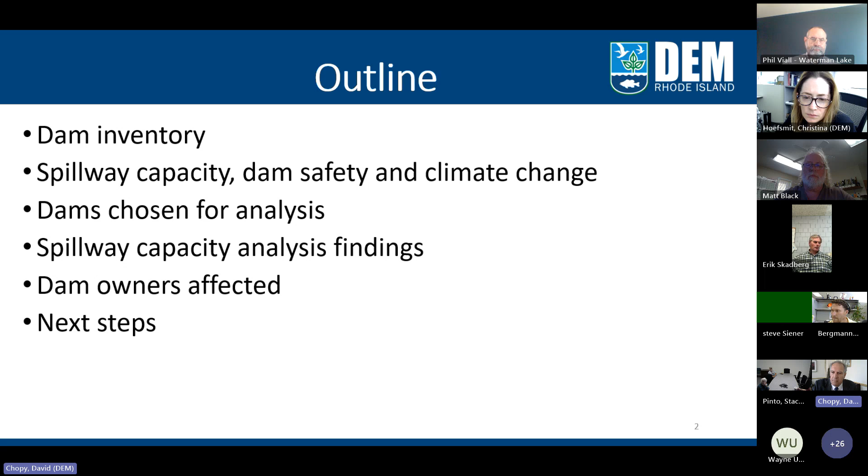Sorry. So there are 670 dams that the state regulates. There's thousands and thousands of dams in the state. Most of them are very small, 1 foot, 2 foot height. We don't regulate those. We only regulate dams that are 6 feet or more in height, or have 15 acre feet or more of storage capacity. And just for perspective, an acre foot is about 325,000 gallons.

Or it's been identified as a high hazard dam, which I'll explain if you don't know, though most of you probably already know this, or a significant hazard dam. So if it's not in one of those categories, we do not regulate it, even though it is a dam. Our focus is just on the regulated dams. There are currently 96 high hazard dams and 81 significant hazard dams. Sorry, that's what it was when we did this study. It's changed a little bit, as you note in the footnote, but it's the high hazard and the significant hazard dams that are the focus of our program.

There are 494 low hazard dams. We don't spend any effort on low hazard dams except to evaluate whether they should be upgraded to a higher class because some construction or buildings have occurred downstream that might warrant changing the classification. So the focus of our program is high hazard and significant hazard dams.

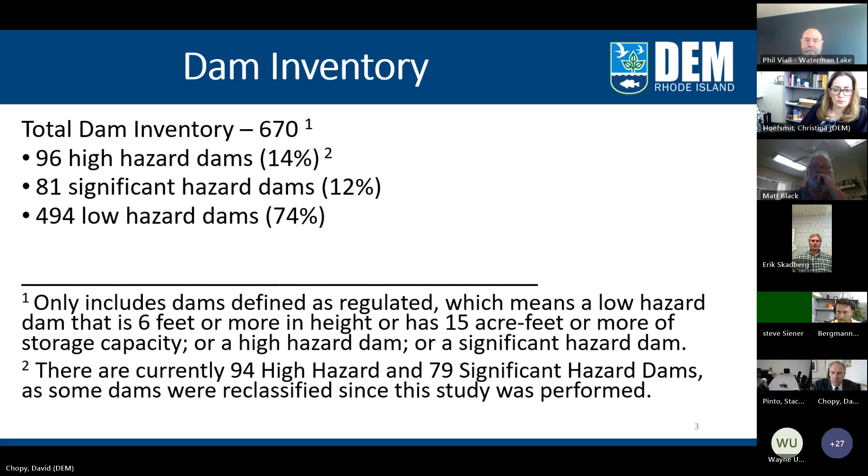For those of you who don't know, the hazard classifications have absolutely nothing to do with the current condition of the dam. They are totally separate things. A dam could be in poor condition, but that has nothing to do with its rating, whether it's a high hazard or significant or low hazard. It's strictly based on what would happen if the dam were to fail. That's what these classifications are based on.

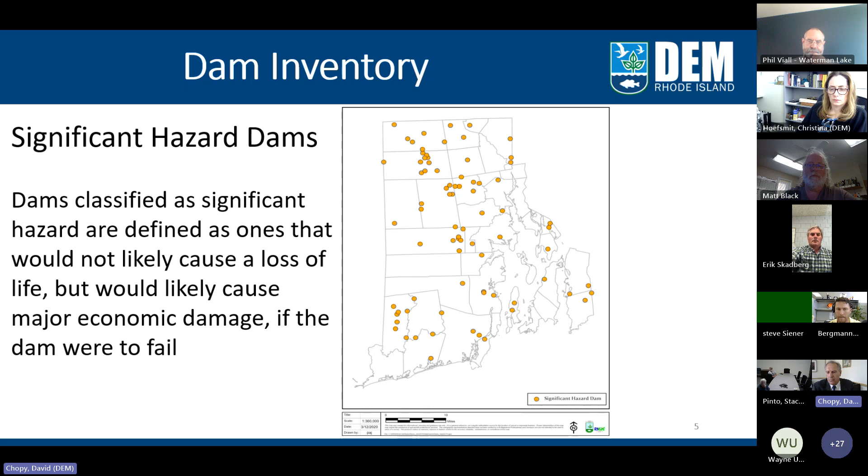These are all of the significant hazard dams. So a significant hazard dam is one where if it were to fail, it's not likely to result in a loss of human life, but it would cause major economic damage. And as you can see, almost every city or town has a high hazard or a significant hazard dam within it.

And these are all the low hazard dams. As I mentioned earlier, we don't focus on these. When we get complaints about them, we do respond. We just let people know that it's a low hazard dam and we're not concerned about it from a dam safety perspective. Because low hazard dams, if they fail, are not ones that would likely result in the loss of human life, nor would they cause any major economic damage. That's why we don't focus on them for this program.

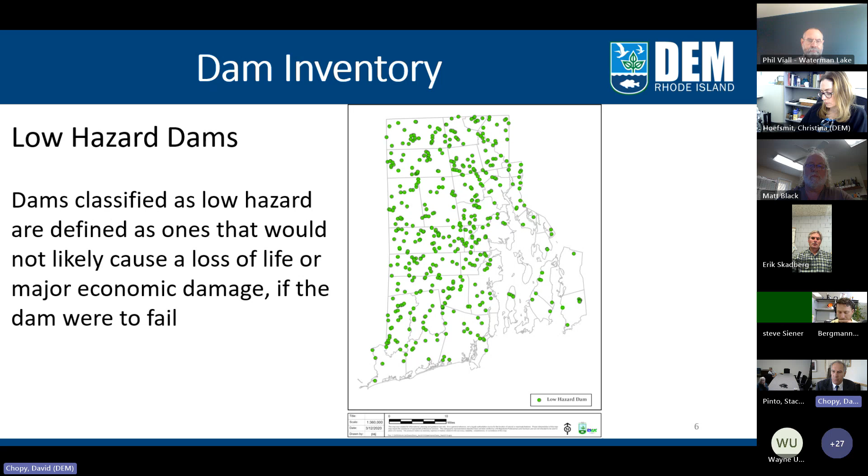I wanted to spend a little bit of time going over this slide because the focus of the spillway capacity analysis was really geared toward this type of dam. So Rhode Island has two basic types of dams. This one, which is an earthen embankment dam, and then we have what we refer to as the run-of-the-river dams. That would be a dam that's on, for example, the Pawtuxet River, where the whole dam is the concrete spillway that goes across the river. It's not designed like these earthen embankment dams, and the concern about failure of the dams is different for the run-of-the-river dams from the earthen embankment dams.

Since most of the spillway analysis dams had to do with earthen embankment dams, I wanted to just focus on this. So as a lot of you know from your dams, you'll have earthen embankment dams. There's an upstream embankment, and then you'll have the crest of the dam, and then you'll have the downstream embankment. There'll be some type of control structure within the impounded area that allows you to lower the water level or raise the water level behind the dam. And there will be some type of spillway that allows the water to flow around the dam and to the downstream channel. And then there'll be some kind of mechanism that keeps the water within the open spillway channel.

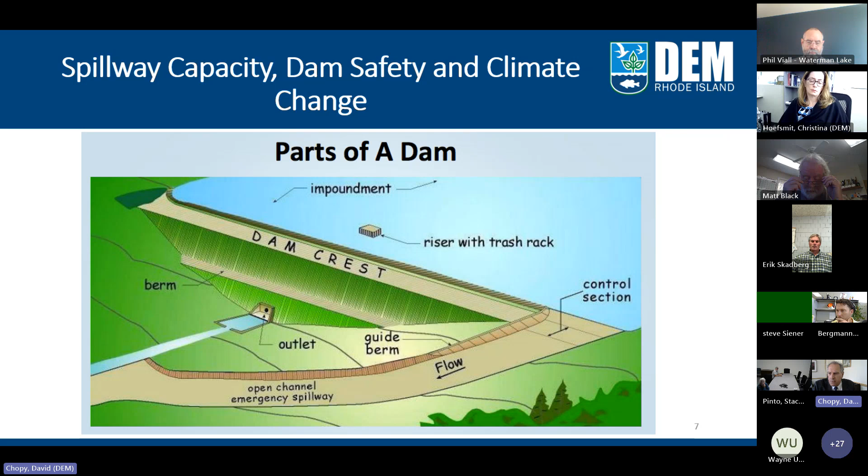So the interest for this has to do with the March 2010 flooding, the August 2014 flooding event in Islip, New York, and just the overall increase in rainfall over the years. In the March 2010 storm, we had 2 significant hazard dams and 3 low hazard dams that catastrophically failed in Rhode Island. Fortunately, no one was injured, but it was a wake-up call to further address dams in Rhode Island.

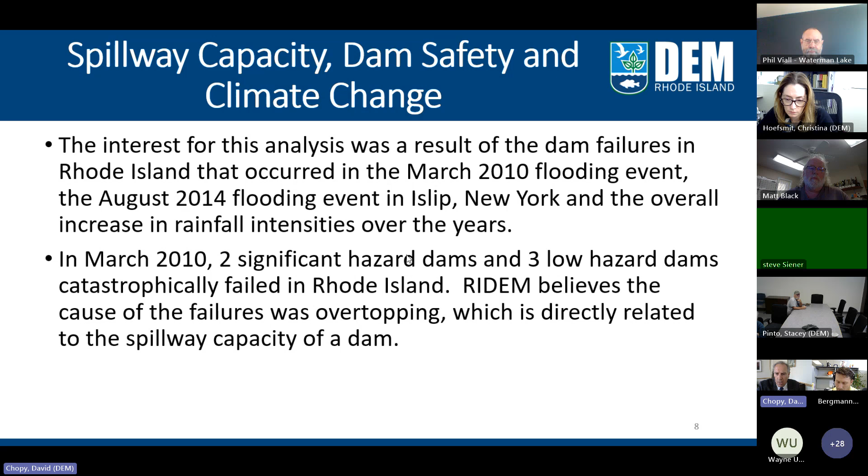We think, we can't be positive, but all of those were earthen embankment dams, and we believe that the cause of the failure was overtopping. And that directly has to do with the spillway capacity of the dam. So that was the basis for doing this study. We wanted to know what other dams were in danger of overtopping if we got that kind of a storm again.

So just to give you some more information, in August 2014, 13.5 inches of rain fell in 24 hours in Islip, which is greater than a 500-year storm. And Islip is about 86 miles from Rhode Island. So it was very easy to have that storm drop that much rain on Rhode Island. It just happened to hit south of us.

We didn't have a whole lot of information about the spillway capacities of the dams. We didn't know what they could handle as far as flows go. And we asked NOAA to model what would have happened if that Islip storm had struck Rhode Island, and the results were that it would have caused record floods on pretty much all of the major rivers.

And we know from what climatologists are telling us that rainfall intensities are on the rise. We see it ourselves with the kind of storms we're getting and how quickly the rain falls and how much falls. So we have a very real concern about the dams and whether they're capable of handling this amount of water.

So DEM is responsible by statute for ensuring that all the dams are maintained in a safe condition. And when we're trying to evaluate whether a dam is safe, what we are really looking for is whether it's unsafe. And unsafe, as defined in our rules, is it poses an unreasonable risk of failure.

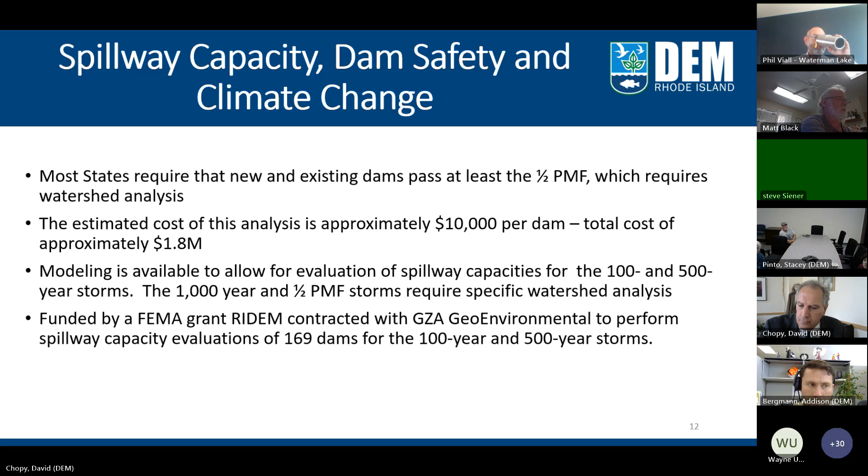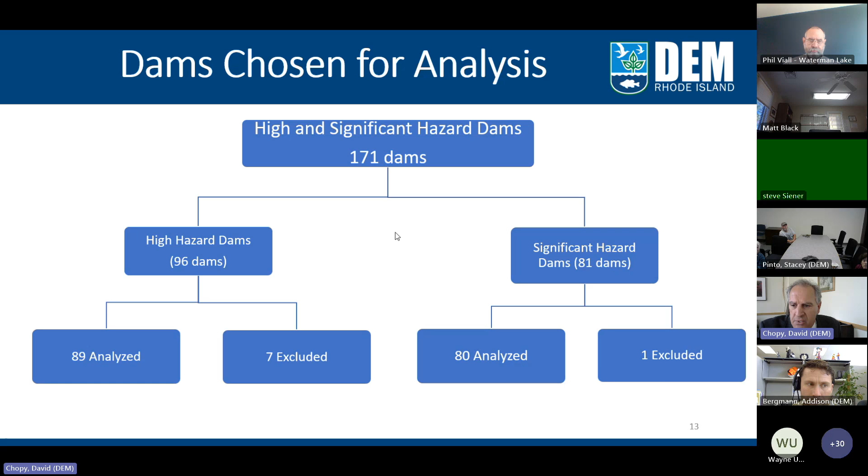So of the total, there were 171 high and significant hazard dams, 96 high hazard, 81 significant, and they analyzed 89 high hazard dams and 80 significant hazard dams. We excluded 7 high hazard dams and 1 significant hazard dam from the study, and I'll explain in the next slide why we chose to exclude those particular dams.

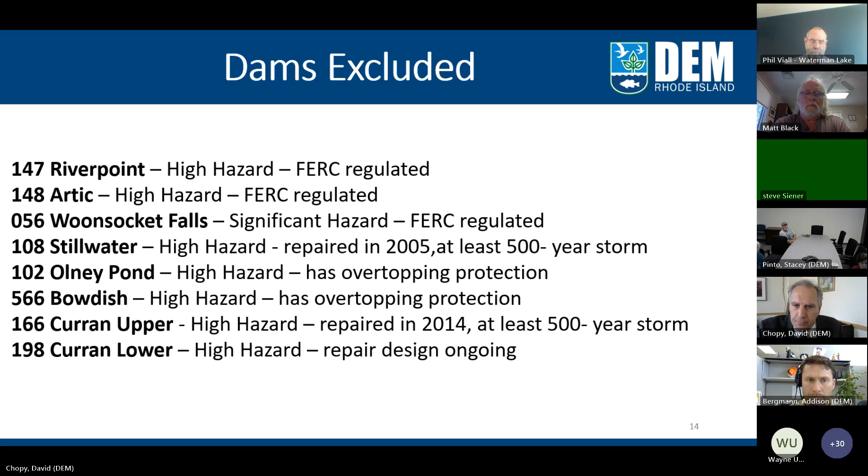So these were the results. Of that 89 high hazard dams, 25% of them could not pass the 100-year storm, 22 dams. So we considered those to be the highest problem category, and we called those Category 1 dams. 17% could pass the 100-year storm, but they could not pass the 500-year storm. There were 15 dams that were in that category. So those are the second dams of concern. So we called those Category 2.

Fortunately, 58% of the dams could pass the 500-year storm. So that was good. So 52 dams out of the 89 that are high hazard could at least pass the 500-year storm. Those we considered Category 3 dams.

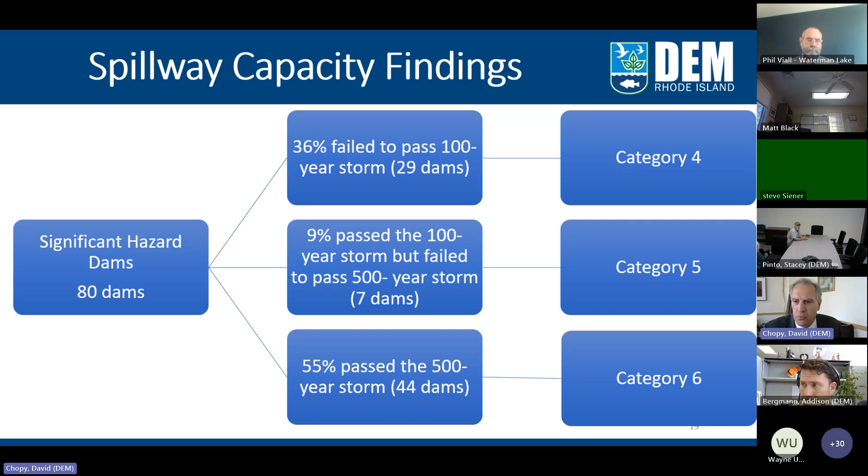So as I mentioned earlier, we're concerned about safety. Obviously, high hazard dams are more of a concern to us than significant hazard dams, because those could result in a loss of life. So those got higher category ratings, because those are the ones that the department will focus on first.

So next steps, what we need to do is work with the owners to deal with these dams. So if you're in a Category 1, 2, 4, or 5, these are the five things that you can do, or will have to do, to address this particular issue that we have.

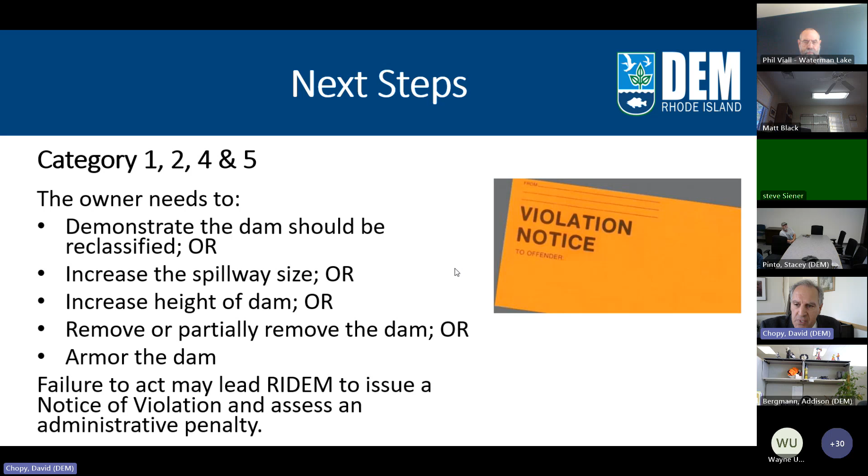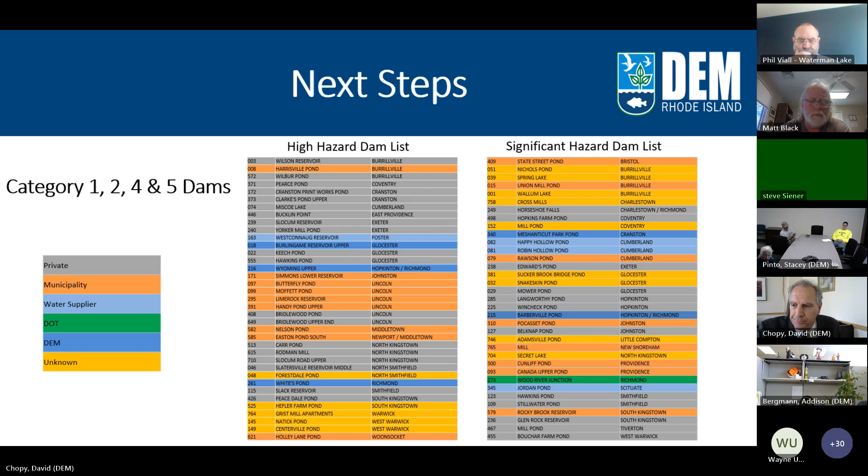The category 3 dams. As I mentioned earlier, you need to be able to show for a high hazard dam that you can safely pass the half PMF storm. Since the study that we did only demonstrated whether you can pass the 500-year storm, the owners are going to need to either, one, demonstrate that the dam should be reclassified, or they're going to have to perform a spillway capacity analysis for the half PMF storm. And like I said, those run about $10,000, or it was $10,000 the last time we checked.

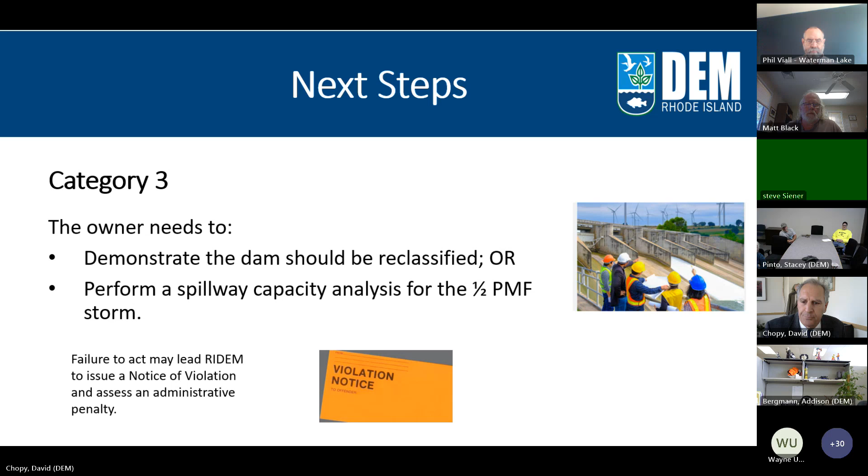And again, if you don't act, it might lead DEM to issue a notice of violation and assess a penalty because we would consider this to be a maybe unsafe condition and require some further analysis to be done. These are all the category 3 dams. Again, color coded so that it's easier for you to identify which ones fall into what category for the dam that you care about.